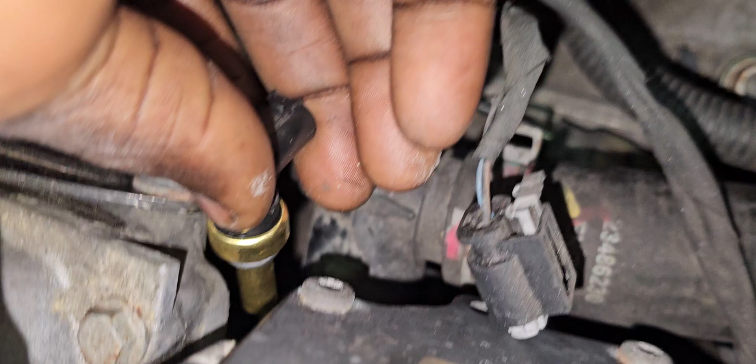I ordered the part yesterday. The guy went there, but they already closed, so he's going back there this morning. Tell him to just cancel it because I went there.

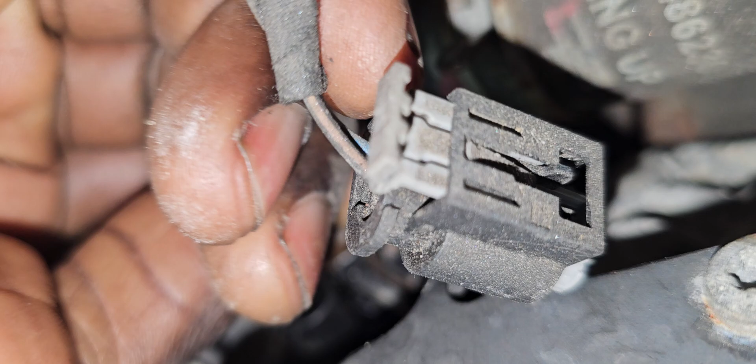Yeah, but these ones are supposed to be changed. That's what I ordered. So the guy is going to pick up the sensor? No, no, tell him to leave it, don't pick it up, don't cancel it. Listen to me, tell him we already picked it up. My electrician guy sent his son to already pick up the part. Come back here, I didn't even know he picked up the part. Yeah, come, the guy picked up the part already. Tell him we already picked it up. My partner sent his son to pick up the part already, he picked it up already.

I didn't know that, you didn't tell me that, my man. I don't even know, I was working here. He was home. No, I said if it doesn't work there, you check the car, that's what I was telling you, anyhow I'll check it out.

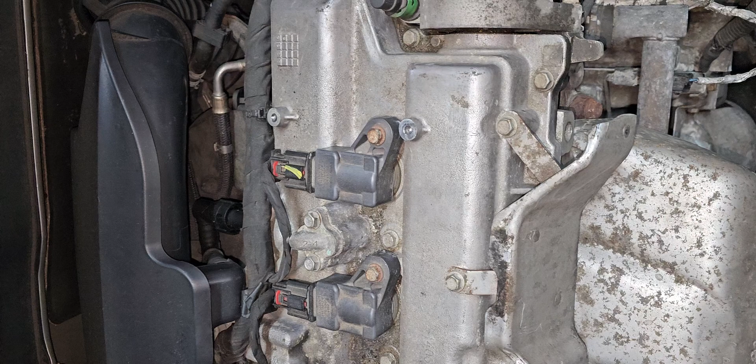I see what the problem is inside. The value is the reading of this one here. In the data, it's 270 something, like hot, 200 and something degrees. It's supposed to read like 70, 80 degrees. That's too much temperature.

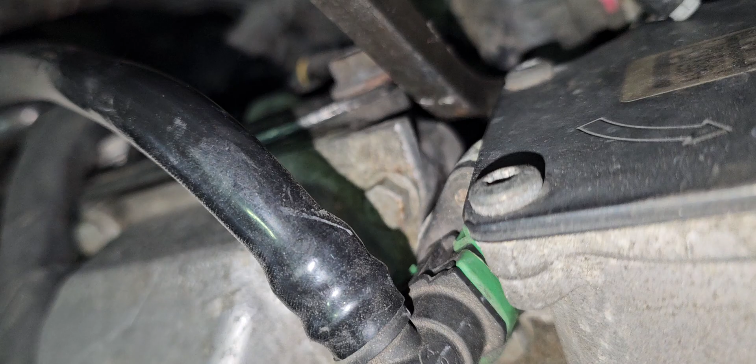So then my son was in, what they call, the Honda dealer to pick up a remote. I said, you know what, because I have this value, let me go collect it. I called the guy, they have only one, that's what I have. If you go there, you never get it, only one. So yesterday at least we got it. I ordered it, yeah.

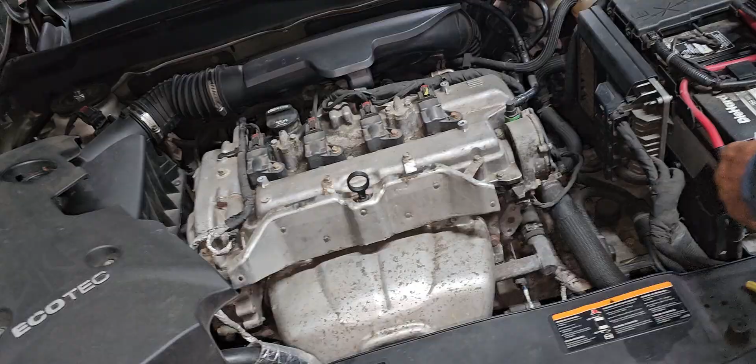When you take that out, it's supposed to come out. Do you bleed it? No, not bleed it. Okay, let's start it and see. Because it's already reading like 200 something, I want to see how much the reading was before.

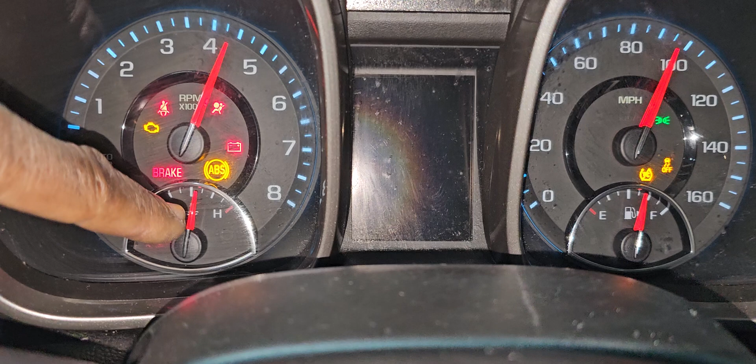I'm going to check now using the small scanner. Paris, open the ignition, I want to see the temperature.

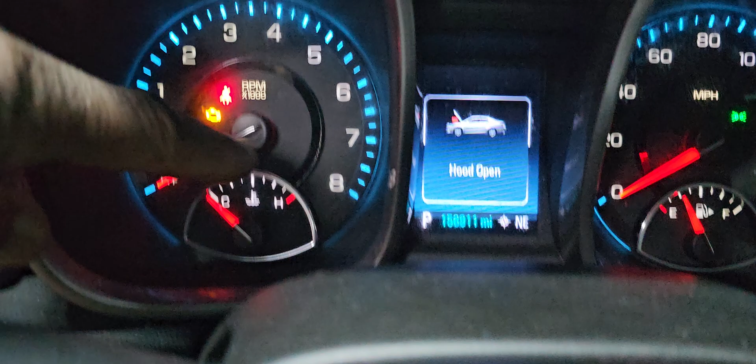That's the normal temperature, before it was 290 something without the car started. Change the coolant temperature sensor with a new one. The fan was working all the time. The coolant temperature reading before the car start, car cool down, room temperature was up.

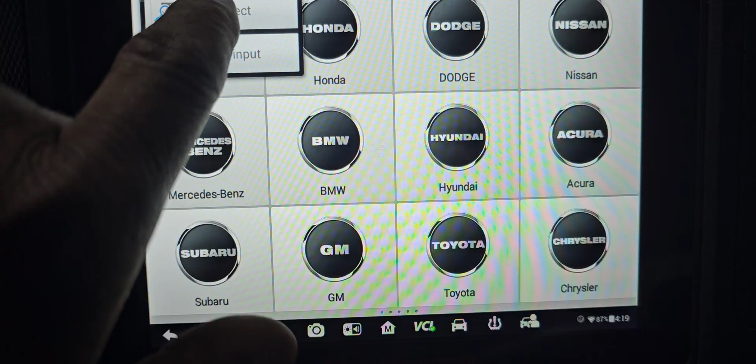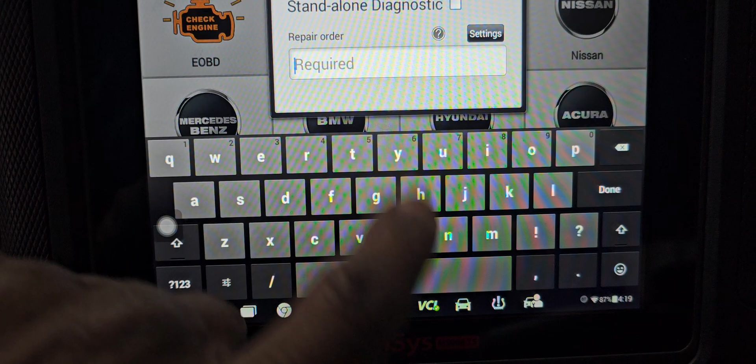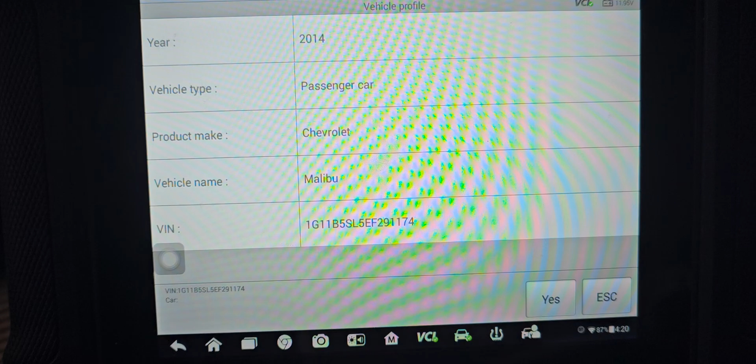Diagnose, scan the VIN. You see, you can put the information here. Malibu, 2.0. Just consider how many engines there are, but I just take one.

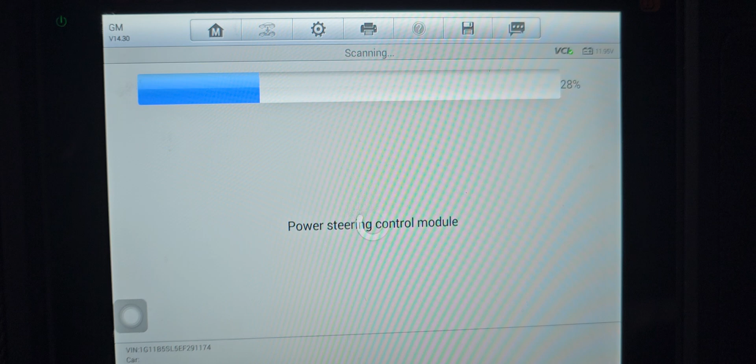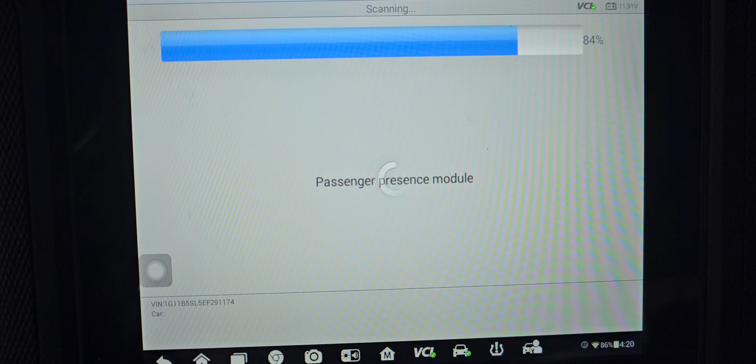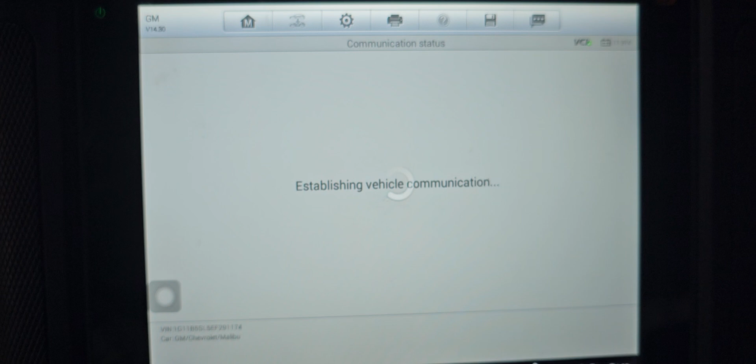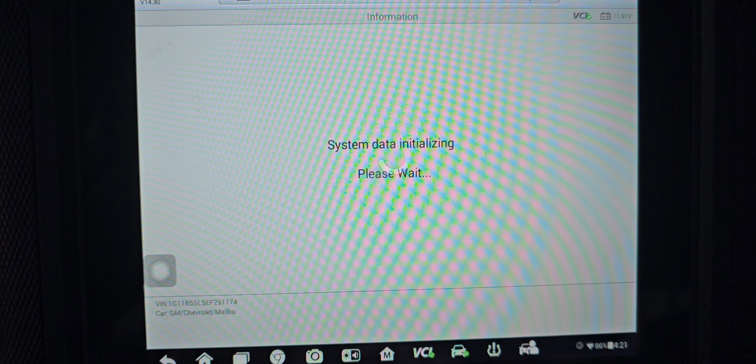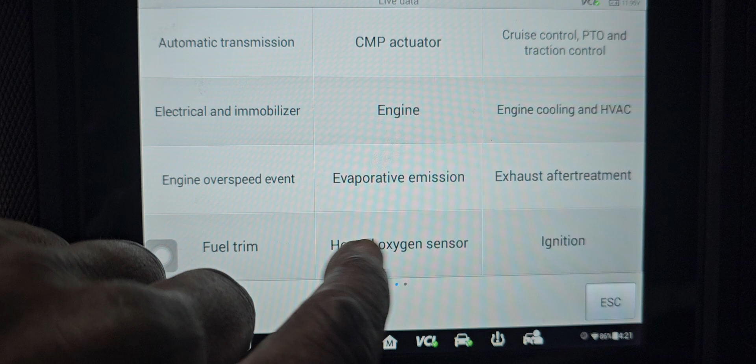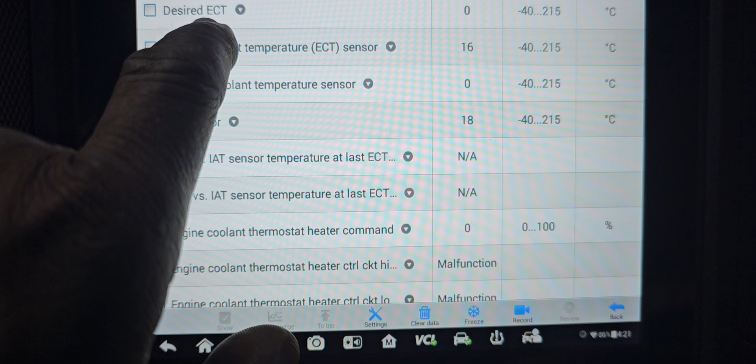Remember on that video, the beginning start, you can watch the first video. You see here, engine coolant temperature is 16 Celsius. Before it was 200, if you remember on the other video, 200 and something. Now it's 16. Perfect, it's going up, 18.

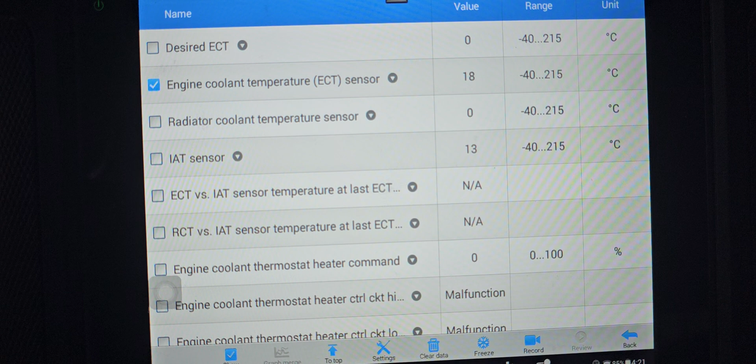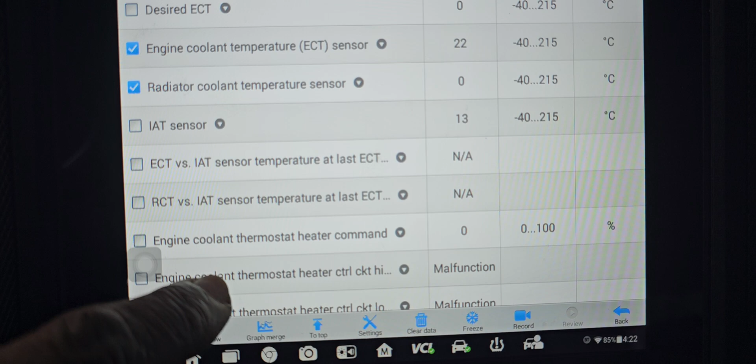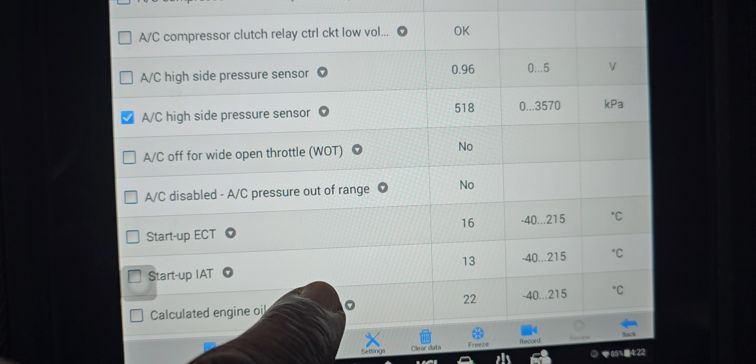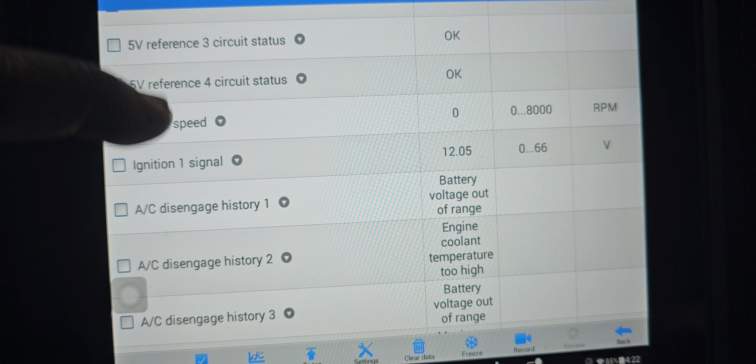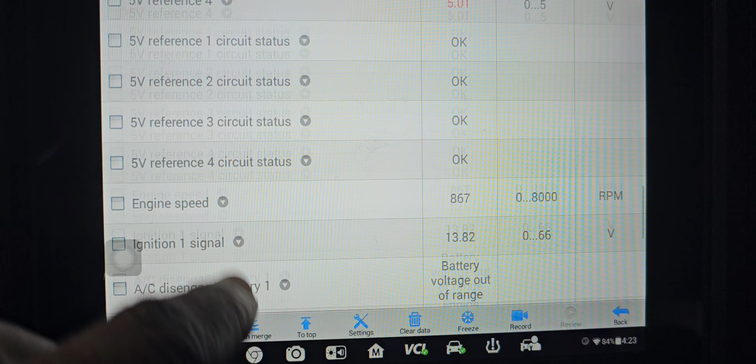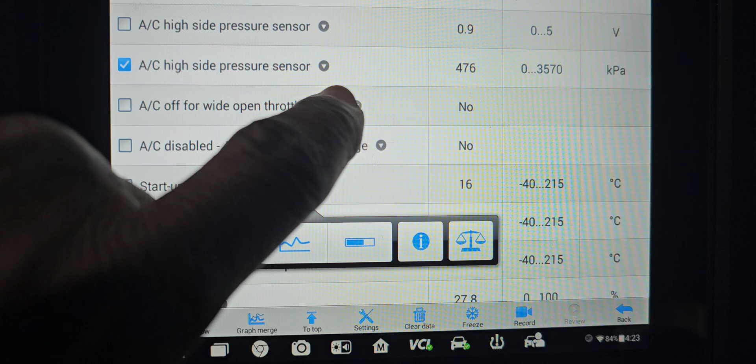All 5V reference, okay, all the information you can get from here. Engine running time 1 minute. 5V reference, okay, 1, 2, 3, 4, they're all good. They're a little bit higher, 5.01, because maybe the car is running. Both cooling fans are off. Engine coolant thermostat 0.0.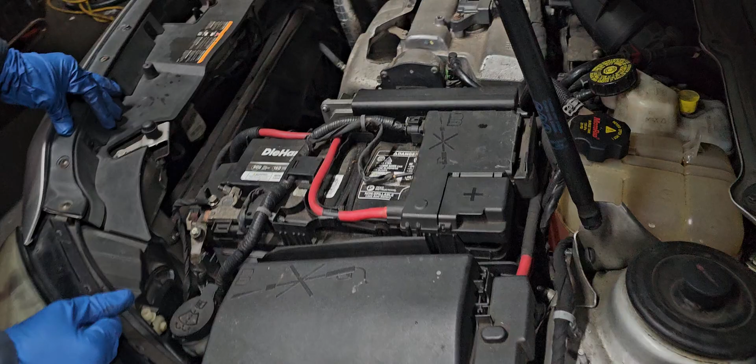Mahmoud, just put that cover for me. That's it, reading now, 40, 50 and going up. Yeah, but my problem is why? No, it's okay, it's okay, yeah, because this is based on pressure. Unless if this car has a, we're gonna leave it running. We're gonna take this one, leave it running, and then...

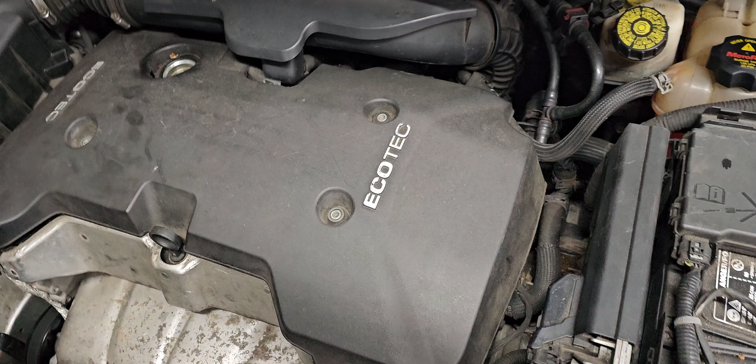You have some screws here. No, you have only one. I don't know, somebody was working on this car. I don't believe this car has bleeding, right? No, I'm not bleeding. Okay, so leave it running. You have a new water pump. I'm gonna leave it running.

New thermostat, you see when I have it here, 200 something, 250 degrees hot. And the temperature was over half. It started like this, over half. It doesn't make sense.

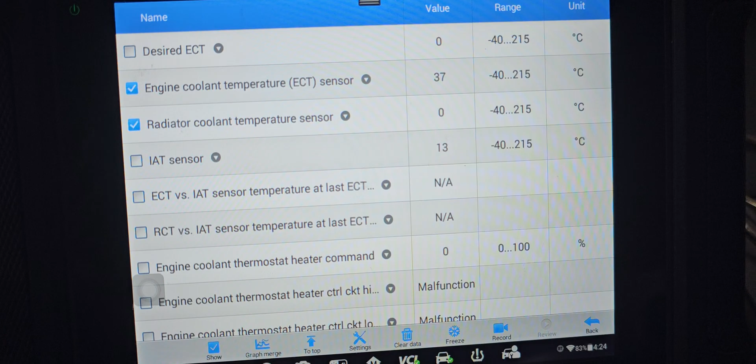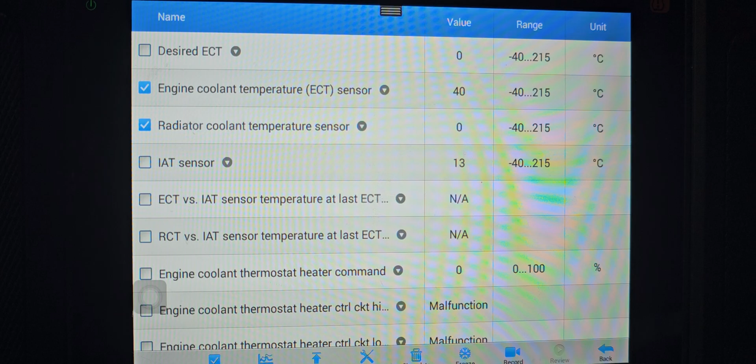See now here, temperature 37, which is normal, and keep going, 40, 41. Because this car has 2 sensors, one on the radiator and one also on the engine. Some of them like...

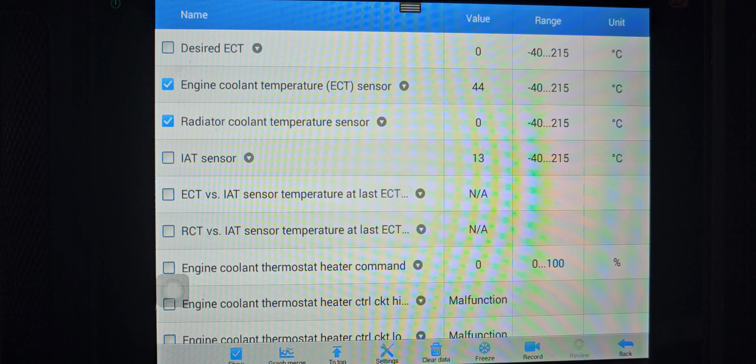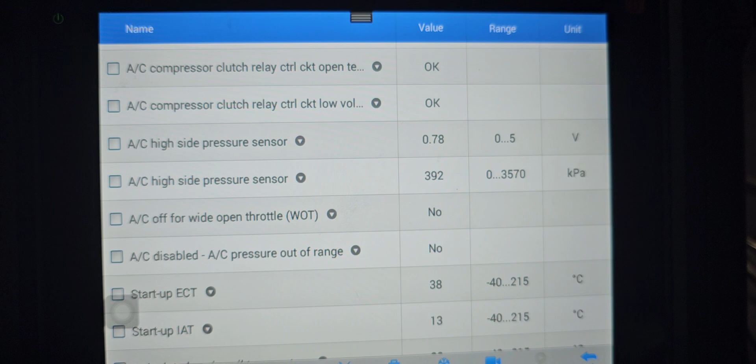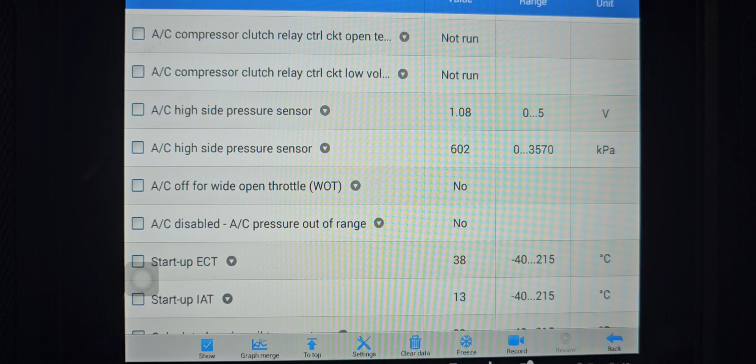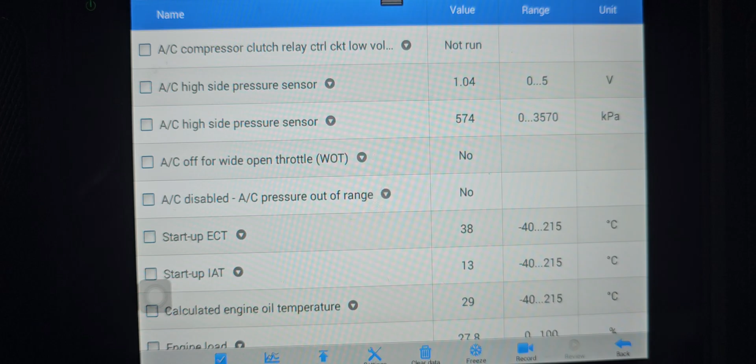High pressure side, let me put the AC on. High pressure side, I put the AC on already, we have no AC, AC high pressure side is going up. AC voltage pressure sensor is 1 volt, the higher the voltage, the higher the number is gonna go. AC off for wide throttle, no. AC disabled, no, let me put gas if I do wide throttle.

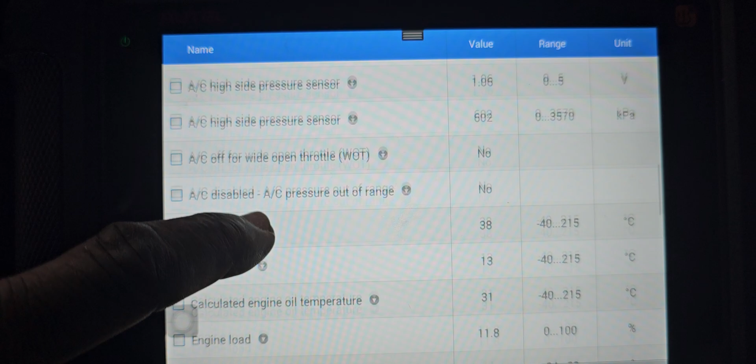No, it never does anything, it doesn't change now. Engine speed, engine ignition 1, AC battery.